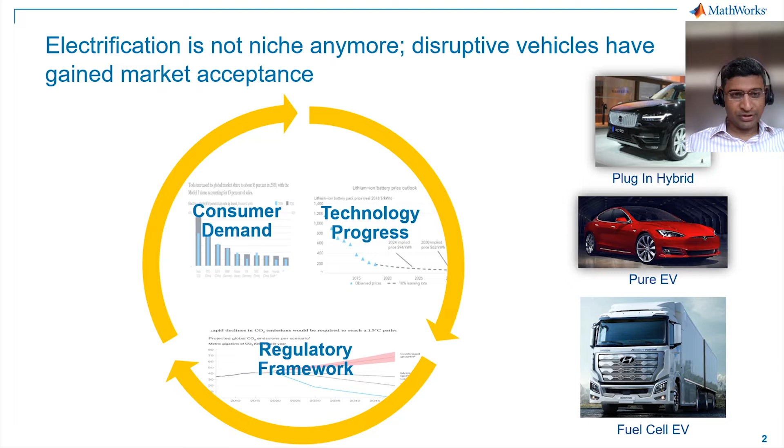So this slide does have a lot of information. It does have a lot of hyperlinks also. I'll be happy to share these slides with you. But now I'm going to share some of my learnings.

The top left graphic basically speaks about Tesla. Tesla has been using model-based design almost since their inception, since they were a startup company. The first time we got the opportunity to do some joint work with them was for their Tesla Roadster. That was an electric sports vehicle. And recently, 2 years ago, they also published an interview where they said that they could use model-based design efficiently for improving their motor efficiency by about 6 to 8%. However, that resulted in overall vehicle efficiency improvement of 15 to 18%. So just see how bettering the design of a component affects the overall vehicle's performance also.

And all Tesla did was they practiced and used newer techniques for motor control design. Of course, they were always using a lot of good techniques like field weakening, but then they further improved it, and that resulted in excellent benefit for them.

The second example is Ather Energy, our own Ather Energy. Ather Energy was a startup company long, long ago in IIT Madras, and now they have started producing their vehicles.

So for Ather Energy, what we understood from Ather is how they graduated from scratch, how they develop new competencies, and how they are now getting into production. They have also used model-based design to a great extent for developing several controllers. And in that link, you can find a little more about where they exactly use model-based design, what were their challenges, and what benefits they got.

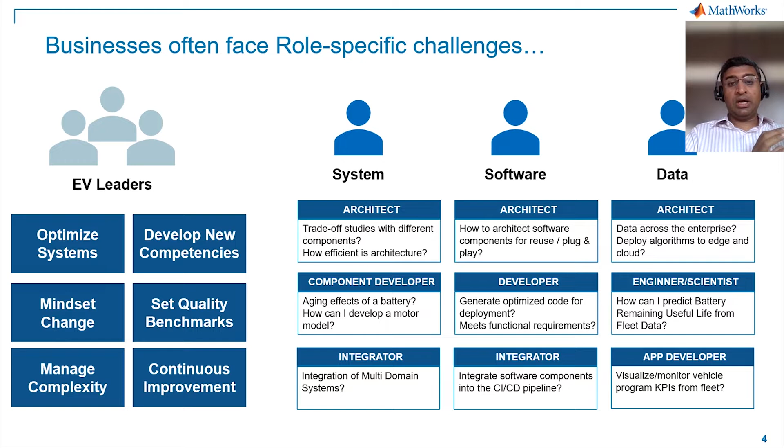For battery, the battery system engineer or battery component engineer will care about modeling the battery with temperature effects, with aging effects, etc. The BMS, the battery management system developer, strives hard for generating optimized code from the BMS model. And the battery data scientist will look into predicting battery remaining useful life from the captured data from the field.

So every engineer working on a component or working on a system has a different perspective of looking at the system. And the three main perspectives are these, which is system, software, and data. So meeting these challenges requires you to have a comprehensive solution.

You need your tool chain aligned in this fashion, where you should be able to understand the system aspect of it, software aspect of it, data aspect of it, because the solution is going to require at least these three things. And within the system aspect also, there is going to be electrical and thermal. And then as we integrate different components together, there is a whole different set of challenges that comes along with that. So that is how the tool chain that you're using needs to be.

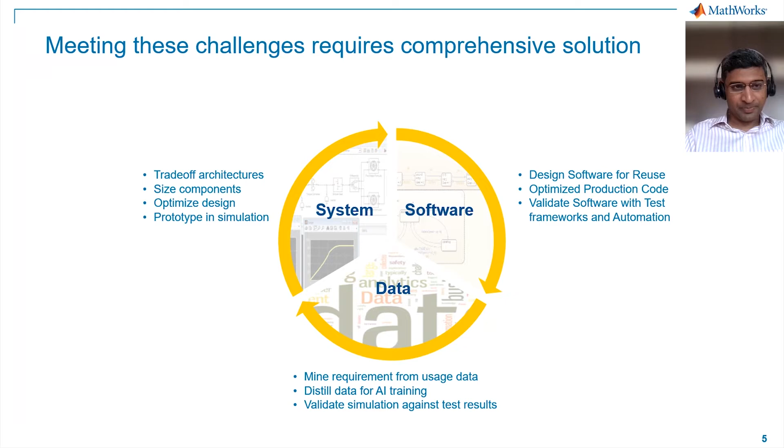So taking it one level further, what is the workflow for system level development? The slide talks about learnings. Again, the slide has several links to several things. But what I am going to talk to you about is the ideal workflow, what we have seen at many companies, how they do system development.

So there are these steps: system architecture, system performance, component development, and system validation. Now, this is at a very high level. I'm not talking about the V cycle development in this slide. That is still applicable, that is there throughout a vehicle process. But these are the main steps.

So nowadays, there is a lot of importance being given to system architecture modeling. A lot of people care about model-based system engineering before doing system design and system development. There are multiple tools for doing that. But the main value one gets from model-based system engineering is you are able to understand requirements much clearer. You are able to understand the relation between IOs of different components.

That also helps you to understand, if something changes in one component, which components it will affect. So that kind of dependency analysis can be done much easier by doing model-based system engineering. You can also link your system requirements to your system design, which is probably done using Simulink. In the MathWorks world, it's done using Simulink as a platform. So that is where system performance comes into the picture.

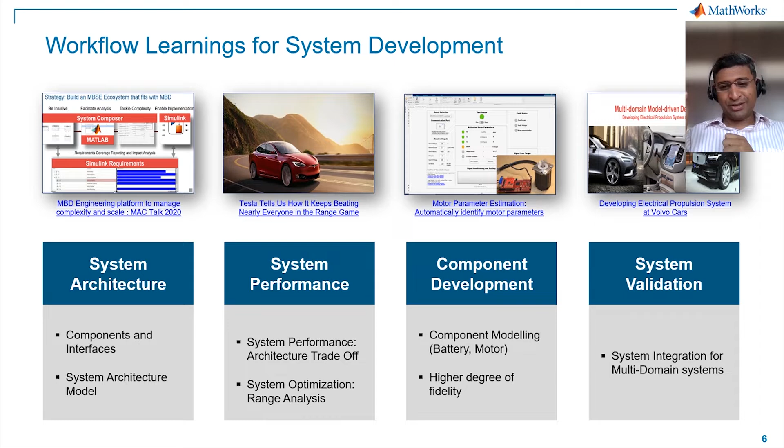Of course, achieving all this in the first go is not expected. Model-based design is always like you should do one thing at a time and then improve in the next iteration. So that's the way we recommend our customers to do it. You cannot achieve everything. It's a matter of multiple years of effort. Building a system validation model is a multiple year effort. If you really understand the thing, it's in your important and not urgent quadrant. So you don't have to do it, but if you do it, it has a lot of benefits to it.

So moving on to software development, I think software design, code generation, verification, validation, plant modeling are some of the steps there. Software design: we have seen that there's a company called Dongfeng. Dongfeng were experts in hand coding and the traditional software development workflow. But for their battery management system, their new project, they decided to shift to model-based design. And of course, they had to put in more effort, but the benefits they got were excellent.

The most important thing they could achieve was reuse of their software modules. Of course, their quality and their overall time for the second project onwards also improved. But the main thing was reuse. So that's one of the very good learnings that we had. And of course, Dongfeng is not the first company where we have learned how customers can use model-based design and automatic code generation effectively.

Then there is LG. LG Electronics could make use of automatic code generation to meet and exceed their quality challenges. And that's a very interesting story. I will not spend time talking about it here, but I'd request you to go to the link and know a little more about how one can use model-based verification, validation, and code generation to improve quality metrics. And they actually went to zero bugs. That's the achievement they got.

Now, plant modeling. See, we are talking about a lot of control algorithms. For verifying those control algorithms, it's good to have plant models, but you don't want to spend a lot of time building those plant models. So what do you need? You need readily available plant models, which can be quickly parameterized and used for closed loop validation. You might want to do this for a few components. You might want to do this for the whole system.

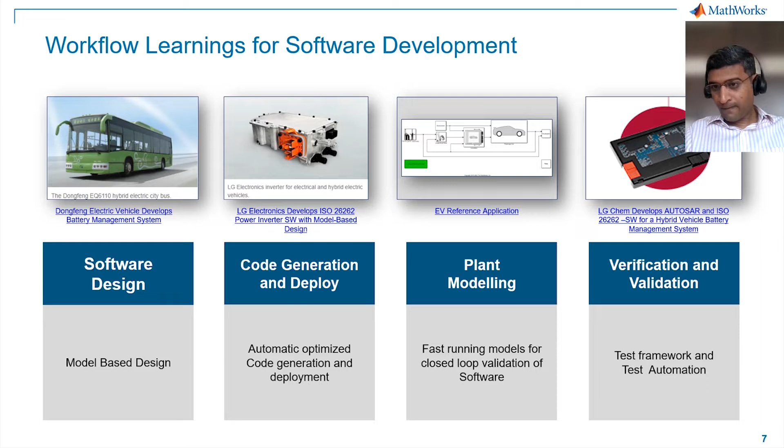Let's move on. So basically, what one needs to understand is different OEMs do work with different suppliers and different companies use different simulation softwares. What is really important here is to build simulation models as much as possible, because now we are getting into the new era of software defined vehicles. Hardware is probably becoming commodity and software is being used for differentiating vehicles and features and models and things like that. So when the software is exploding, we cannot rely on hand coding.

We cannot rely on doing things the way we were doing. That is where a lot of sharing, a lot of collaboration will happen. It needs to happen. And at MathWorks, we are putting a lot of investments into developing Simulink as an integration platform, so that Simulink should be able to talk to or co-simulate with or work with multiple other tools. As of today, Simulink can be co-simulated with more than 150 tools. It is with and without FMI FMU also. FMI FMU is a common interface which allows different tools to talk to each other, to work with each other.

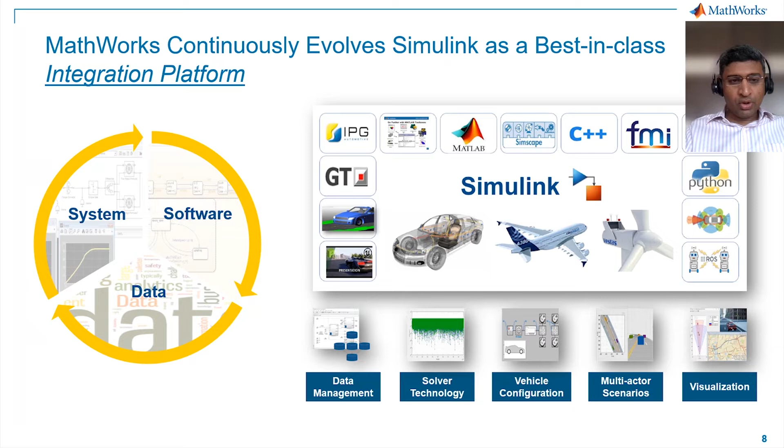So, okay. So everyone please check if you are muted.

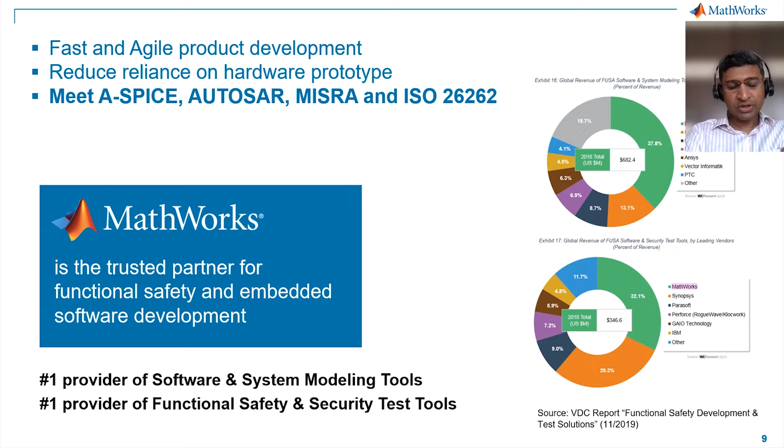Okay. So just to present one thing, MATLAB Simulink has been used a lot for control system modeling, V&V and code generation. And this survey conducted by VDC in 2019 rated MathWorks as number one provider not only for software and system modeling tools, but also functional safety and security test tools.

So just to move on, one very important aspect of it is data science. Now, how do we make use of data? See, there are two extremes. One is too much data available, and second is too little data available. The slide talks about it. This thing, the Daimler fuel cell vehicle. Daimler's challenge was it was a fleet test data. So terabytes of data was getting uploaded to the clouds.

And their challenge was to make use of that data for extracting the features that they wanted, and then they built a MATLAB based framework for extracting that data and making use of that data. They have done a lot of work with that data. One of the things that they did was they could use that data to find out optimum locations for fuel cell refueling within the US, because they were actually tracking which vehicle is going where, and what are the best places for putting refueling stations. That's one of the things they did.

And then the second thing we already spoke about, which is Neo car company did not have any data. So they used simulation for generating synthetic data. These are the two extremes as far as too much data and no data is concerned. There are two more extremes in data science. In terms of skills, one is there are domain engineers who are excellent in making productive, excellent use of data. However, they cannot really handle large amounts of data. They cannot really do AI modeling, so to say.

Okay, AI is a loose term. By AI, I want to say predictive or machine learning or deep learning or related technologies. That's what we are going to refer to as AI as far as scope of this presentation is concerned. So there is this domain engineers who are experienced and not so good in handling data. And the other extreme is the new generation of data scientists who are very good in handling data, who are very good in AI modeling, but they may not be really in a position to interpret that data, and that collaboration is required there.

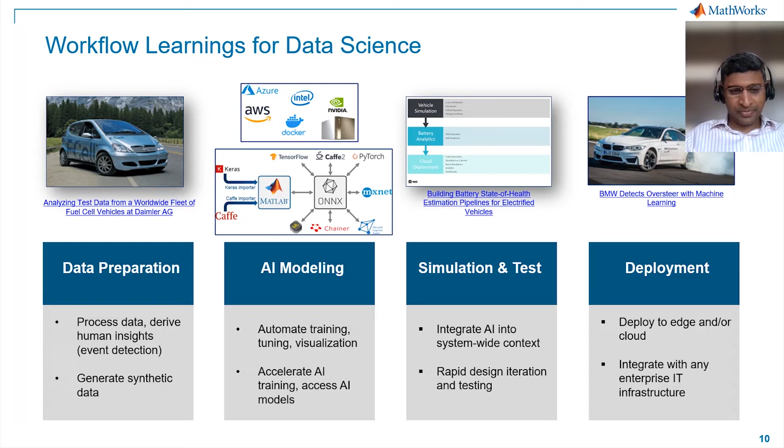Now, let us take it one level below for working level engineers. And I'm almost done with my presentation also. Let's discuss for 5 more minutes. So basically, let's discuss how simulation-based development can be used effectively for xEV, HEV or EV development.

See, what are the challenges for doing model-based design for electric vehicles? We basically want to start with some benchmark. It could be an existing conventional platform, or it could be a competitor platform, or it could be a set of requirements which we wish for our vehicle. Based on that, we'll go for component selection and component sizing.

By component selection, what we mean, which motor should I use? Should I use a switched reluctance motor, or permanent magnet axial flux motor, or PMSM or induction motor? There are multiple things, and in motors also there are many new options coming up. Then there is component sizing. By component sizing, yes, of course, mechanical sizing is important.

But in this context, I'm referring to what should be the output of my motor to meet my requirement, and what should be the rating or size or output of my battery to be able to supply power to that motor for my range related requirements. So that's what I mean by component sizing.

And the final thing is, everything done, all components put together, how does the vehicle look like? How does the vehicle perform to my expectations? And can this vehicle be given to a certification agency for homologation and for getting it certified? So these are some of the challenges of these engineers who are working on model-based design for electrification.

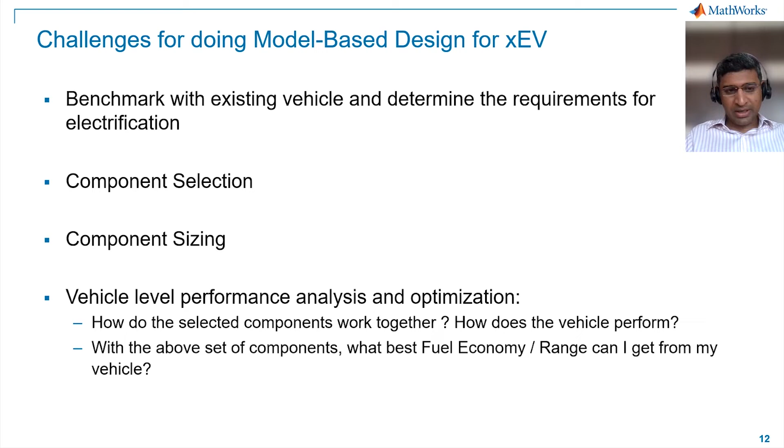So typical questions that we have are basically what will be the fuel economy of my HEV or range of my EV for a particular drive cycle? How do different components behave under extreme load conditions? Will my vehicle control unit be able to handle different cases efficiently?

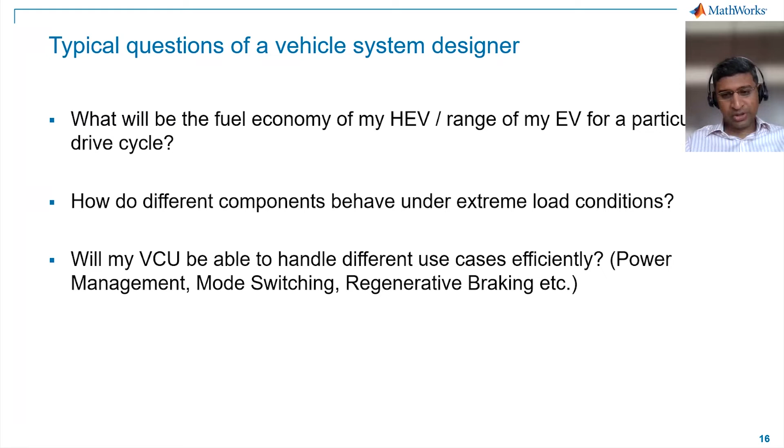There are different things to be done, like power management, mode switching in terms of regenerative braking and cruise mode. A hybrid electric vehicle may have different modes like engine only mode, serial HEV mode, EV only mode and things like that. So there are multiple modes and there are multiple fault cases also. Those need to be handled.

In that phase, if I get a readily available model of an EV, what is my job? My job is to customize it to my needs and make it mine. So let's say I'm designing an electric two-wheeler. I have an electric two-wheeler model available. What will I do? I will look at the motor characteristics. I will change them to my motor's characteristics, close to my motor characteristics.

Similarly for battery, similarly for power electronics, similarly for other transmission and tires and wheels and those parameters, vehicle mass, vehicle dynamics parameters. Everywhere I need to do that. Along with that, I also need to keep in mind that I'm either going to prepare a motor and motor controller in-house or I'm going to get it from a supplier. I need to be in a position to give my requirements to the supplier. That is where it helps one to have the model which is representing the plant and controller separately.

The plant and controller separately will probably not be needed if you're giving it to the supplier, because the supplier is going to deliver you the motor and motor controller. However, if you're doing it in-house, it is always going to help you to have a separate plant model and separate controller model, because you can use that as a starting point for your component development.

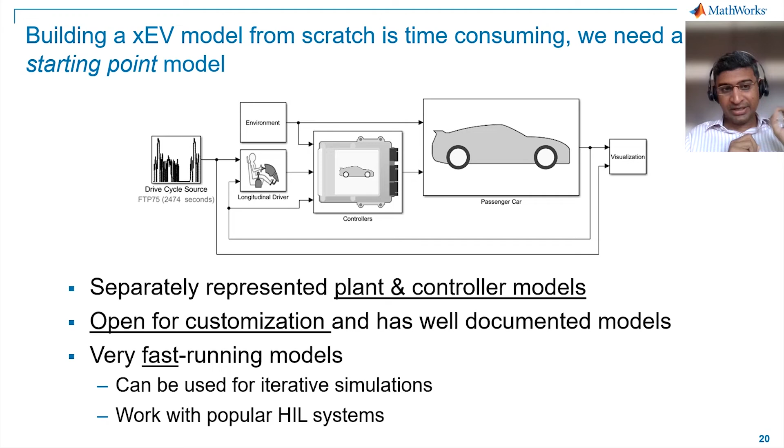This is where I'm not looking for a very detailed model, because detailed models have a lot of dynamics, have a lot of fidelity, they take a lot of time to simulate. However, in this case, our need is to simulate it thousands of times. And I'll tell you in which use case it will get simulated thousands of times also. So that is where for iterative simulations, for working on popular HIL systems, I need the model which simulates fast. So that is the kind of modeling platform you're looking at.

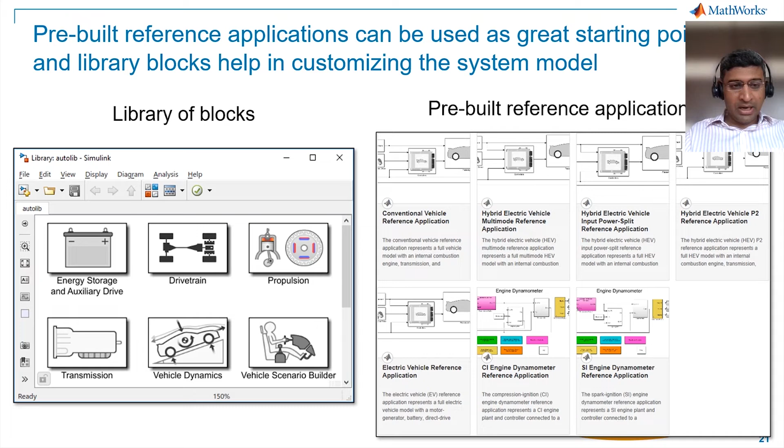So you should have pre-built, I call it reference application models, starting point models, and a library of blocks, which should ideally help you to customize your models. Once you have that kind of model, it basically will help you to do these things. That model will help you to do design optimization, also verification of your vehicle control unit. So in every case, the key message of my slide is on the title of that slide. So just in case, if you miss out on something, that key message will be there on the title of that slide.

So this model can be used for defining numerical optimization problems like maximizing fuel economy of a HEV and minimizing time required for 0 to 60 kmph. This is not or now. Now we are talking about and. We are talking about that design trade-off now. So this is one use case represented by the first two bullets.

Second use case is verify controller performance, the vehicle control unit's performance, for different vehicle level use cases. It could be different initial SOC points of the battery for a HEV case. Or it could be different temperature conditions, it could be different altitudes, it could be different drive cycles, and a lot of things can come into picture. And it can also be used for component sizing.

That's the third bullet, which is battery capacity. What should be my battery capacity? What should be my cell configuration? Or what if I'm using this motor? What if I'm using a motor of this size? That kind of what-if analysis can be done very well once you have this kind of model.

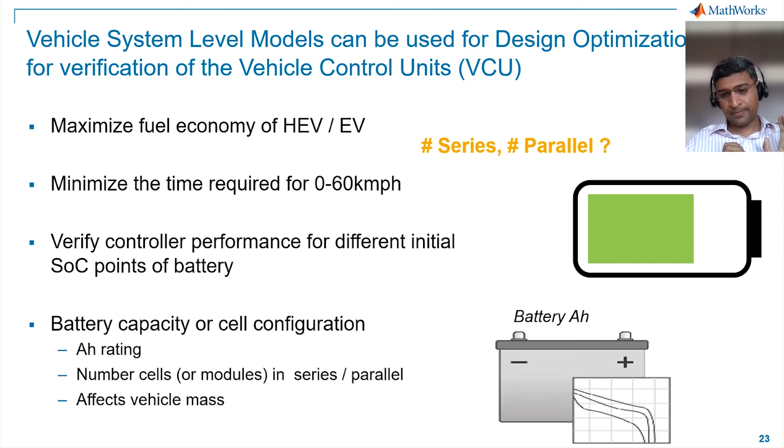Let us take one step further just to talk to you about one example. This is one experiment we have done within MathWorks. Our problem statement was to maximize fuel economy of a HEV subject to a particular time for its 0 to 60 kmph. The example that we used was a multi-mode HEV passenger car. This is a vehicle architecture of a multi-mode HEV, which is Honda Accord.

Now, let me quickly explain what this architecture is all about. In this vehicle, the engine can drive the wheels independently, the motor can drive the wheels independently, and engine and motor both also can drive the vehicle. You can see it in the right-hand side graphic. The vehicle typically starts in EV mode with the motor. Later on, it shifts to SHEV mode, and at the very efficient zone of the engine, it goes to engine-only mode.

The problem statement that we had was to optimize these mode switching for improving fuel economy. The solution was we developed the whole system level model by parameterizing all the components. Then we defined a numerical optimization problem using MATLAB. That numerical optimization problem was defined by using these equations, converting the curves into equations by defining these alpha, beta, gamma, psi. And then we actually optimized, we came up with a solution which is better mode switching.

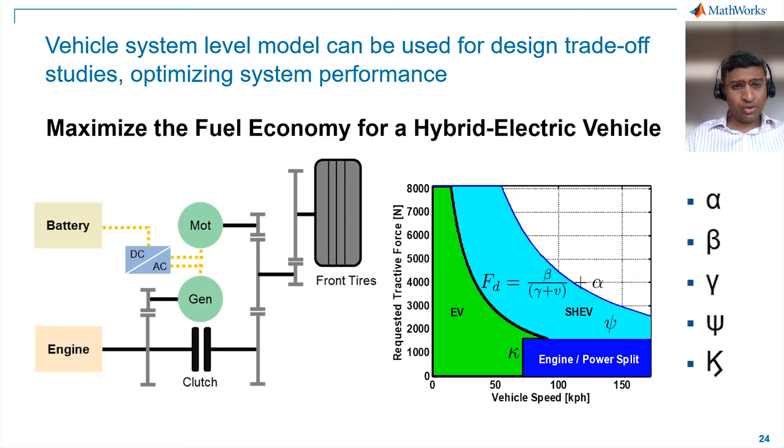Also, the vehicle system level simulation model helps you to better understand requirements for various components. So it acts as a starting point for battery BMS. It also acts as a starting point for your motor MCU. Now this can go to your teams or your suppliers, and then they will deliver you back the other things. So this is the workflow that was used by Volvo for giving requirements to LG Chem and getting things back from LG Chem, and then integrating it back into their system level model and doing virtual validation and things like that.

Now, let me clarify. This is the workflow. It's my understanding this is what Volvo did. In concept, this is definitely what they did. So that's about system level design, vehicle system level design.

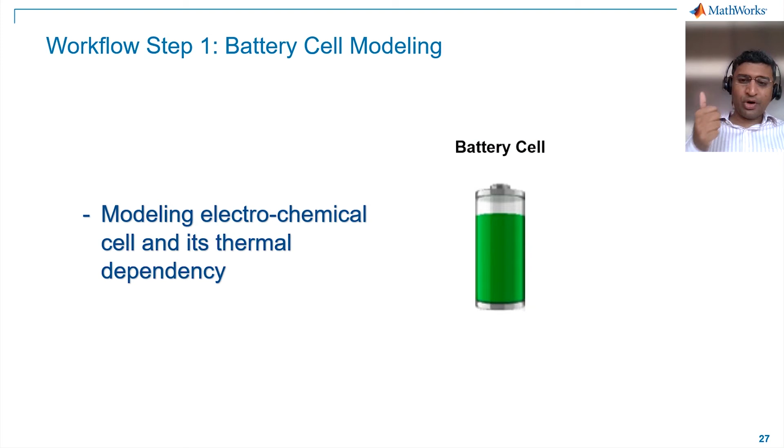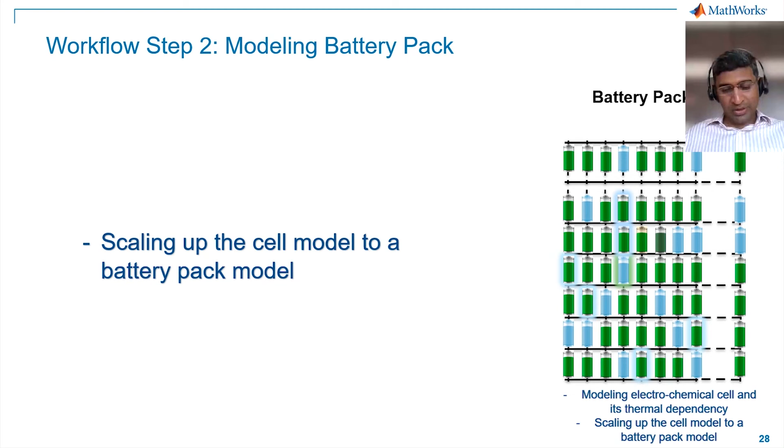Now, very quickly, maybe next 3 minutes, let's talk about one of the challenges, which is how does a solution for modeling battery system or developing battery management system look like? See, there are 5 workflow steps. It's going to be very high level. One needs to model the battery cell. One needs to model the electrical as well as thermal part of every cell. You need a capability to copy paste those cells and connect them to each other, stack them to each other so that you are able to build battery module and battery pack so that the electrical and thermal effects are cascaded.

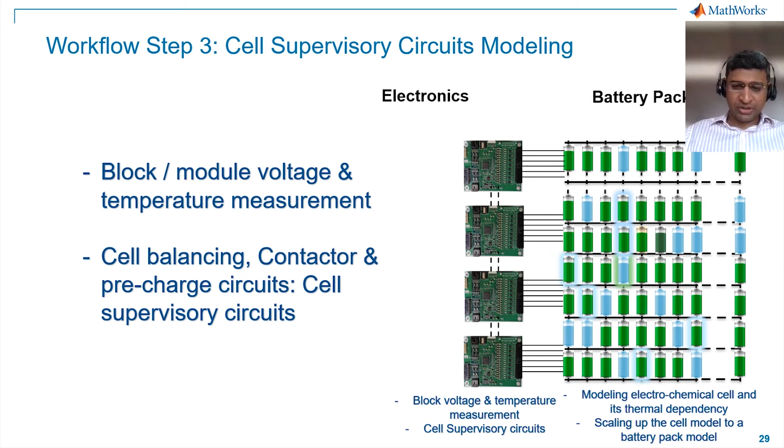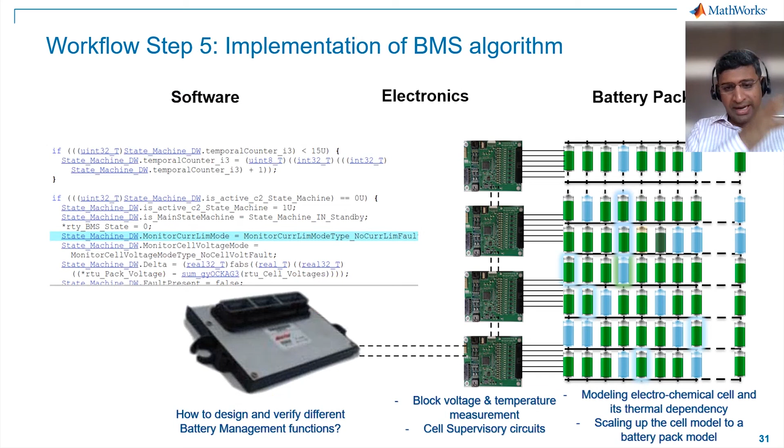Then you should be able to put together some cell supervisory circuits at different points. So measure voltage, temperature, current at different points in the battery pack and bring it ahead so that you are able to design different BMS functions. And then make use of these BMS functions, generate code, and then validate it. So these are some of the things. So this requires one to use tooling which allows you to build an electro-thermal model at a cell level. So that's the thing here.

Now, the approach that we use is equivalent circuit-based modeling. Understand the battery time constant, use 1 RC, 2 RC circuit, and then also represent the thermal mass and thermal conductivity, etc. So if you are interested and if you have access to MATLAB Simulink, we do have a starting point model for you just to understand the workflow. This model has our battery data and you have to replace it. So not claiming that you have a very good starting point, but you can understand this model.

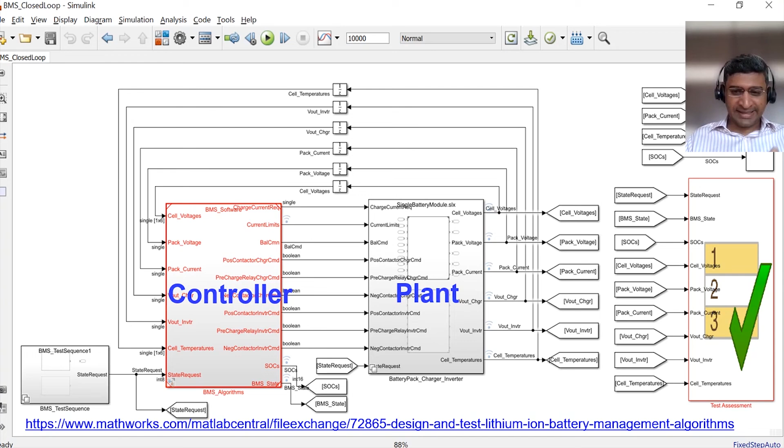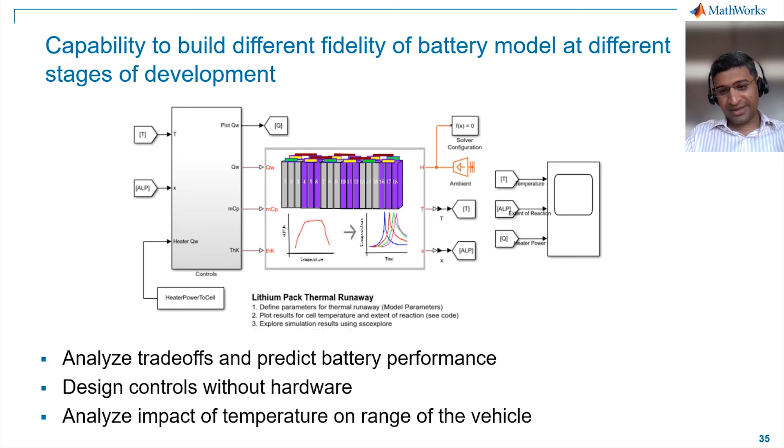This has a 16p6s configuration. And detailed battery models are useful not just for BMS design, but also for simulating things which cannot be tested on an actual battery, like thermal runaway, like short to battery, short to ground, and different non-working conditions for the battery. So that's where it helps a lot.

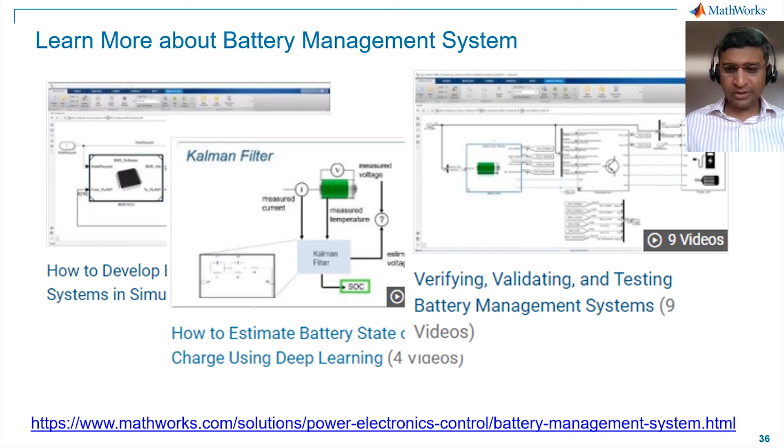You can understand more. The MathWorks website has a lot of data related to battery management system. Of course, it is MathWorks website, so it is showing a lot of things done using Simulink, but otherwise also it is focusing on the workflow, which is applicable otherwise also.

One thing to highlight is I have worked with this person, Vipin Venugopal, at Mahindra Electric. They could make use of 1D simulation very well for designing battery thermal management system for their battery packs. I think this was being used for their MESMA platform. MESMA is their internal powertrain platform for e-powertrains.

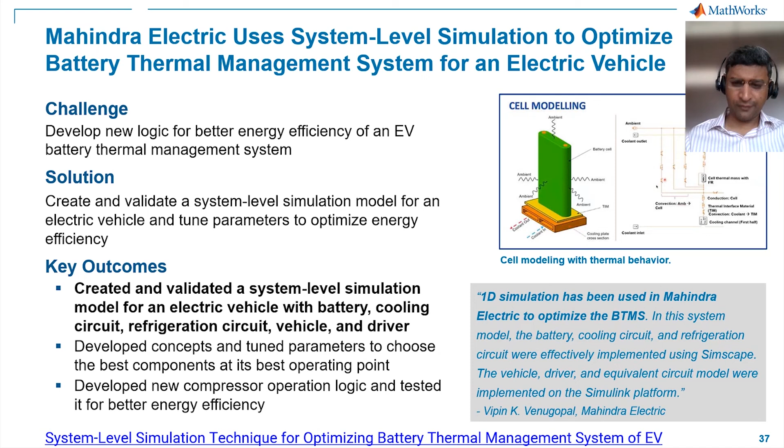Similar thing for motor also. I'm not planning to spend a lot of time. Maybe we can start discussing. I think that is also one good expectation. But to quickly say, see, for a motor control engineer, component engineer, the challenges are slightly different. How do I know if my motor controller will produce desired performance? How does the converter behave? Do they heat up too much? Once it goes to the vehicle, how does it interact with other components? So these are some of his challenges.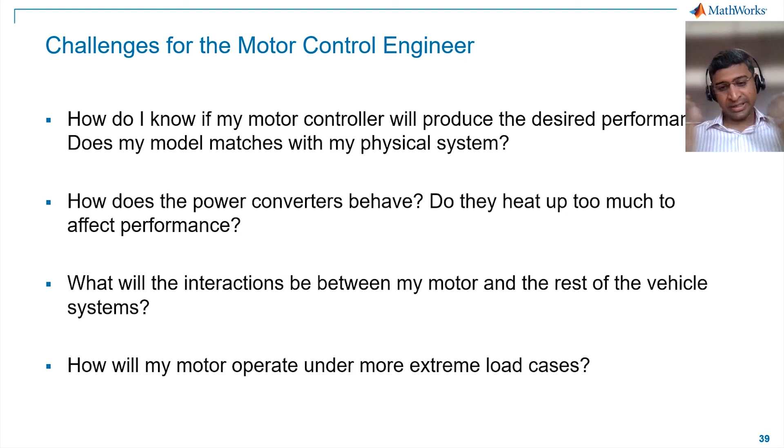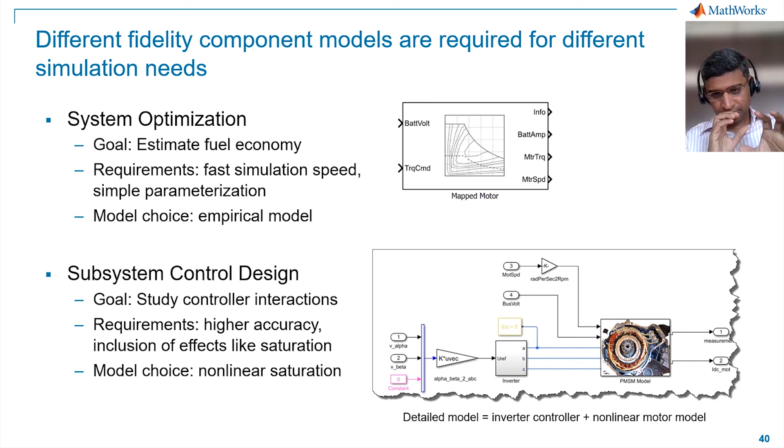So that is where, again, it's always a fight between what is my use case and what is the fidelity required. You should be using the right fidelity for the right use case. One fidelity is use a readily available block or use just your speed torque characteristics for representing a motor. And the other way is to build a detailed motor model, which represents power electronics, which represents thermal effects of motor for designing things for it.

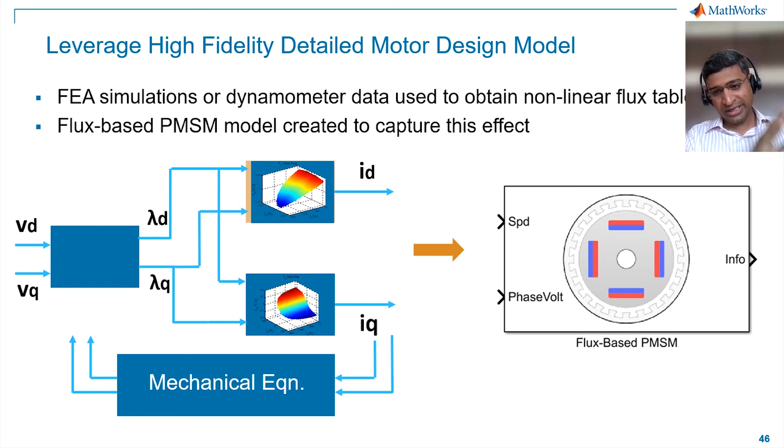You can also see, excuse me. So if you're talking about motor design, then you will use something like ANSYS Maxwell or JMAG or a motor design tool. You should also be able to make use of that data for validating your motor control algorithm. So that is also a need, and that also needs to be supported by the tooling that you're using for motor control design. So anyway, let's not spend a lot of time.

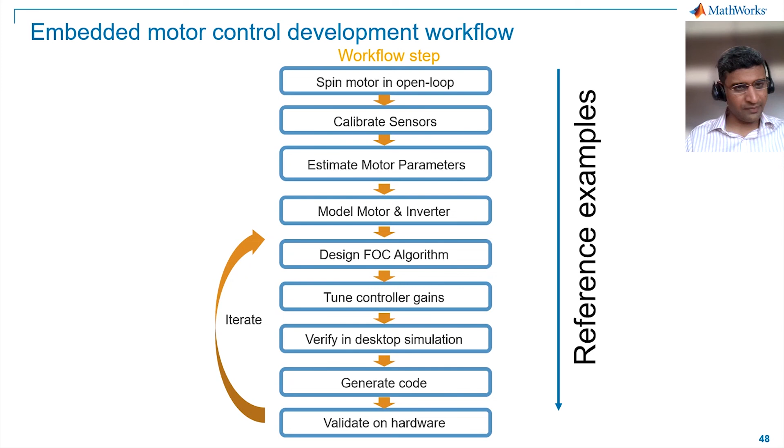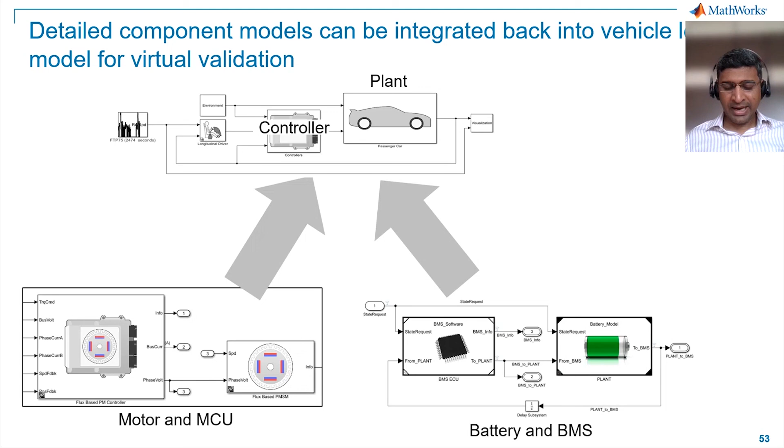Again, motor control is one of our newer area of interest, and that is where we'll be happy to interact with you. End of the day, what we are looking at, or what will be my recommendation, is your eventual workflow. If I start my electric vehicle company, this is what I will strive hard for. Build a vehicle system level model, use it for component designing, and then bring in detailed component design models to build a virtual vehicle model.

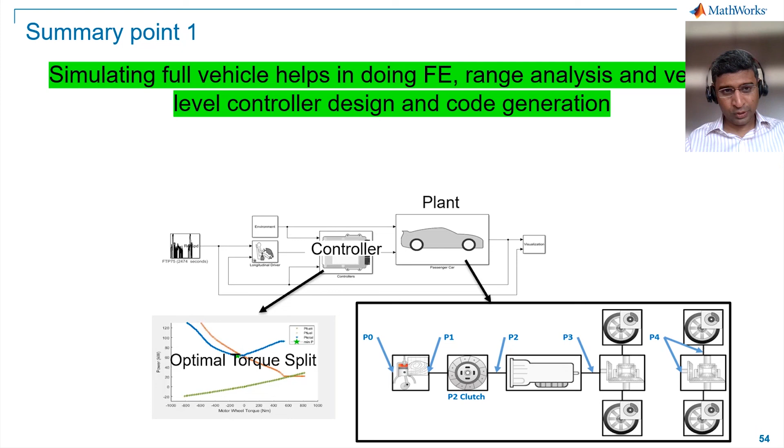So to summarize, simulating full vehicle helps in doing fuel economy, range analysis, and vehicle control design and code generation. Building closed loop battery model, that means battery pack and BMS, again helps in BMS development, agile validation of the BMS ECU. And third, motor and power electronics control design workflow requires quick simulation, rapid control prototyping. Again, you need to have that kind of capability.

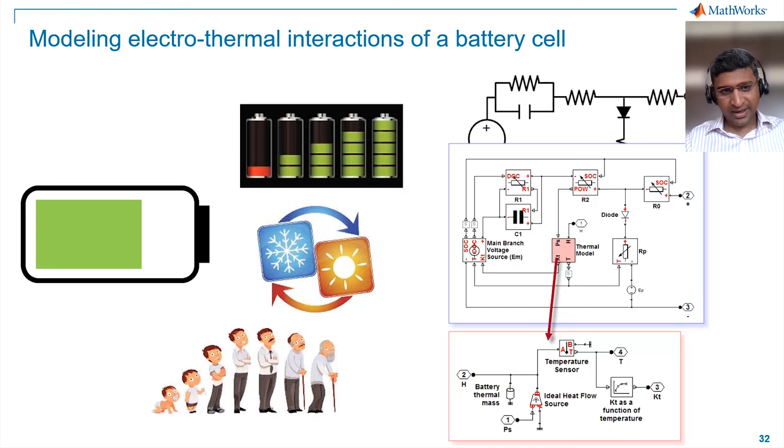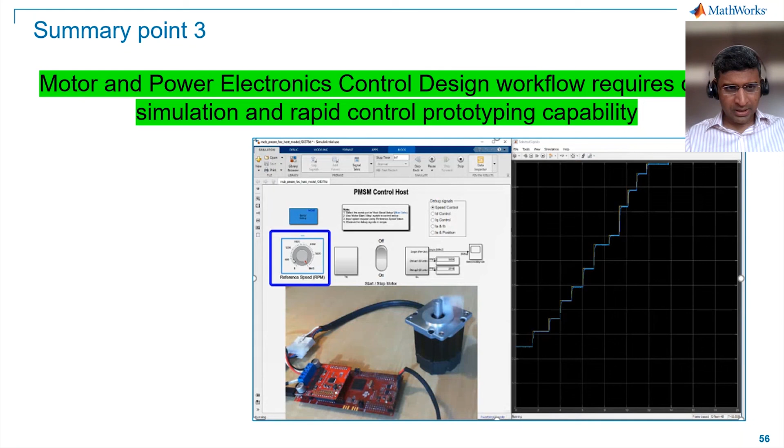Sorry, something is not right. Just a moment. I'm just summarizing. So maybe we can start with questions also. Yeah, so to summarize third point, motor control design workflow requires one to have a good simulation and rapid control prototyping capability. And I think you all use today simulation, code generation, and a lot of virtualization things.